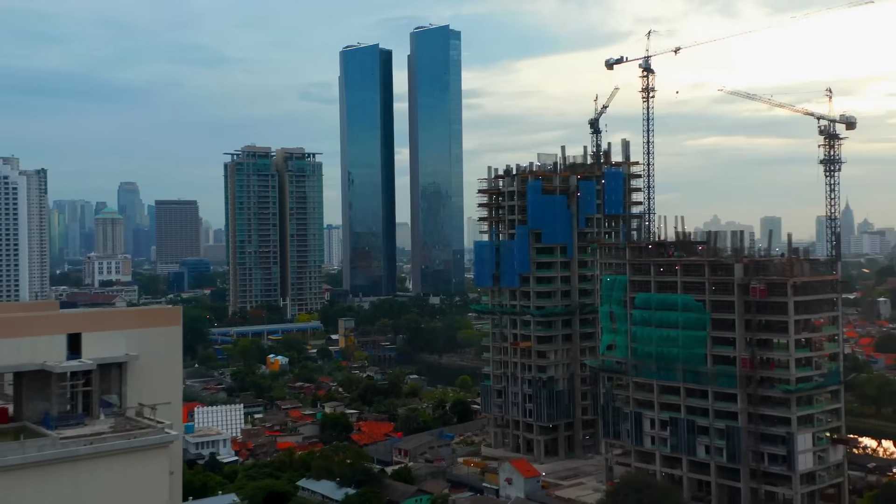Put simply, the way we build our towns and cities needs to change. The construction and operation of current buildings accounts for 40% of the world's energy consumption and approximately one-third of greenhouse gas emissions.

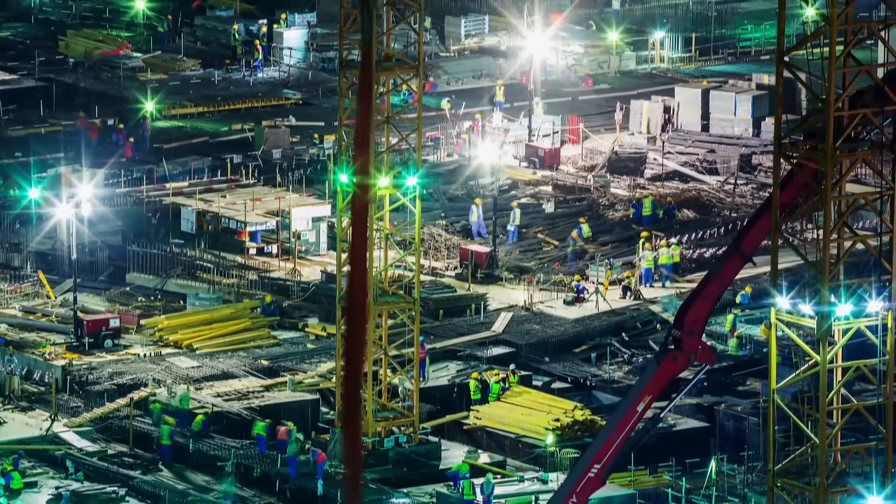But could one of the oldest building materials known to humankind form part of a modern solution for our buildings and cities of the future?

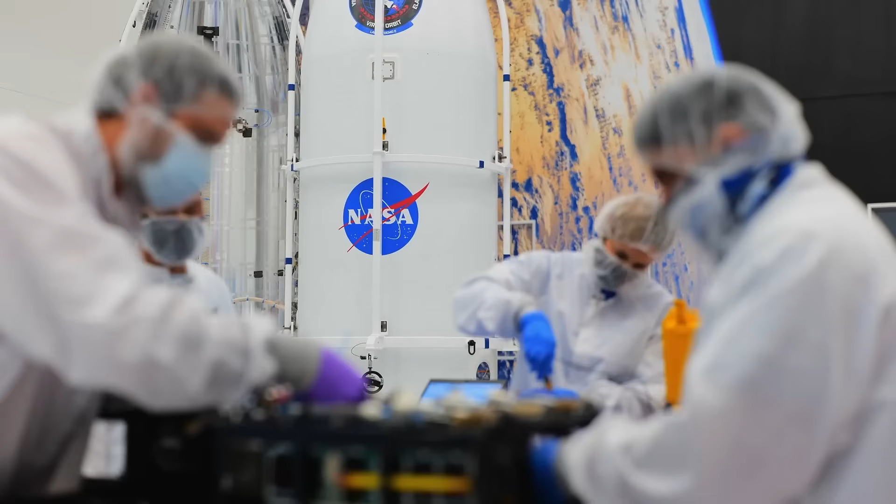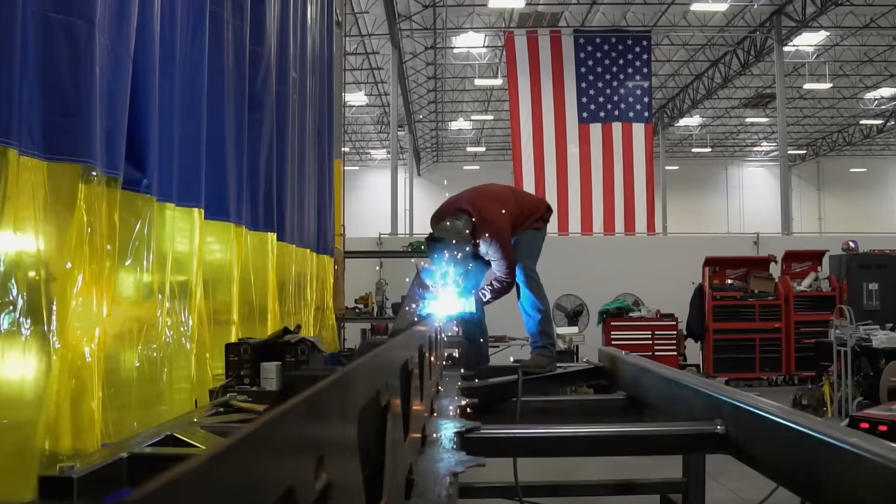A global technological revolution is underway. We think in the next 10 years, you'll see more innovation than we've seen in the past 50, driven by passionate, dedicated individuals intent on shaping a new world. I want to create something new, something that gives me the sense of creating new life. This is why I'm here.

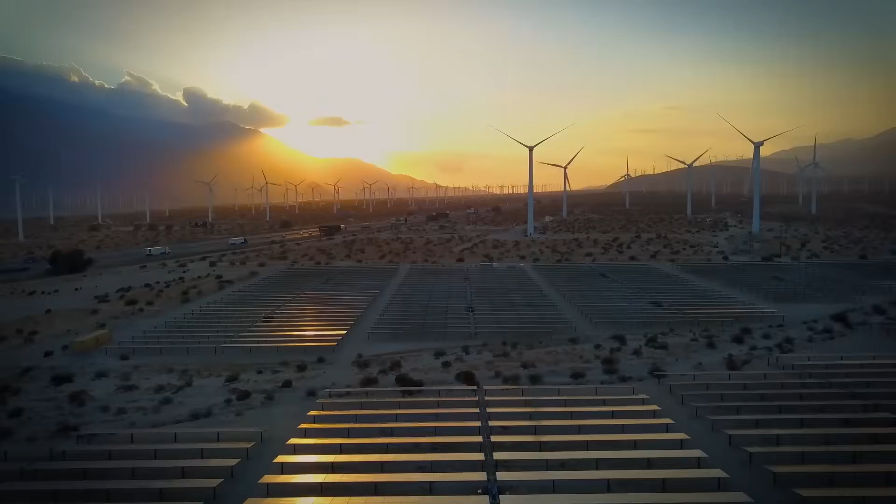A greener world. This is the last call to action, that we have to develop the solutions that are protecting our planet. A better world. I have a family, and when I think about the life I want them to have, and their children to have, I want them to experience a world where they can travel and live without worry. That gets me up and going every day.

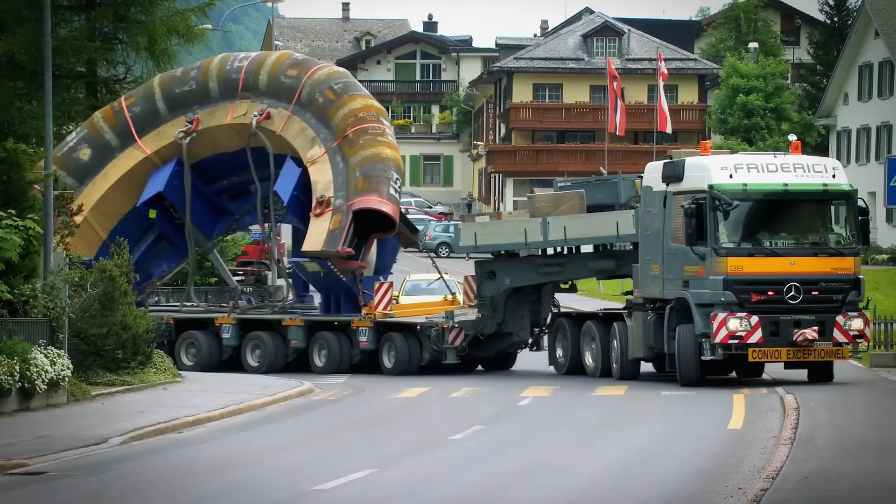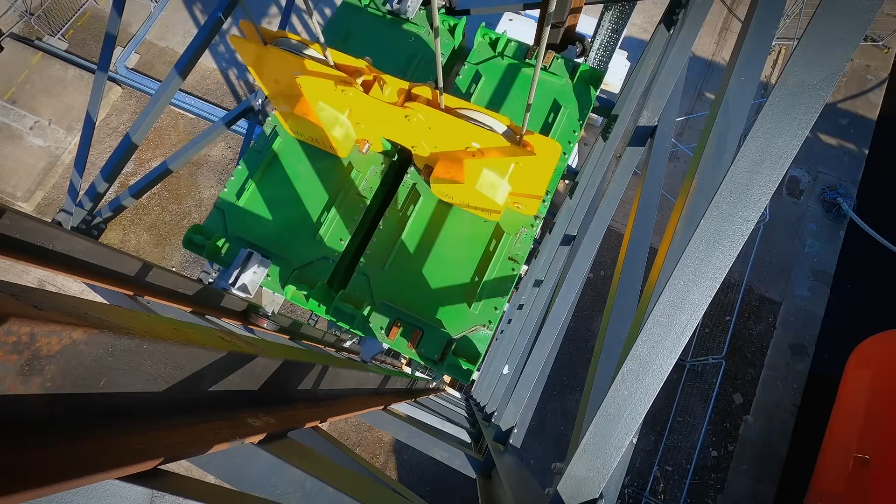Together, they are pushing engineering to its limits. Human creativity is the most tremendous power, and if you set a target, things that you never thought possible become possible - creating extraordinary machines that can help the planet and humankind in the future.

Architect and historian Professor Maxwell Hutchinson has not only been designing buildings for half a century, he's also been involved in their conservation, some of which date back over 1,000 years. He's one of a growing number of people within the construction industry who believes that the huge carbon footprint associated with our current use of building materials, such as concrete, is unsustainable.

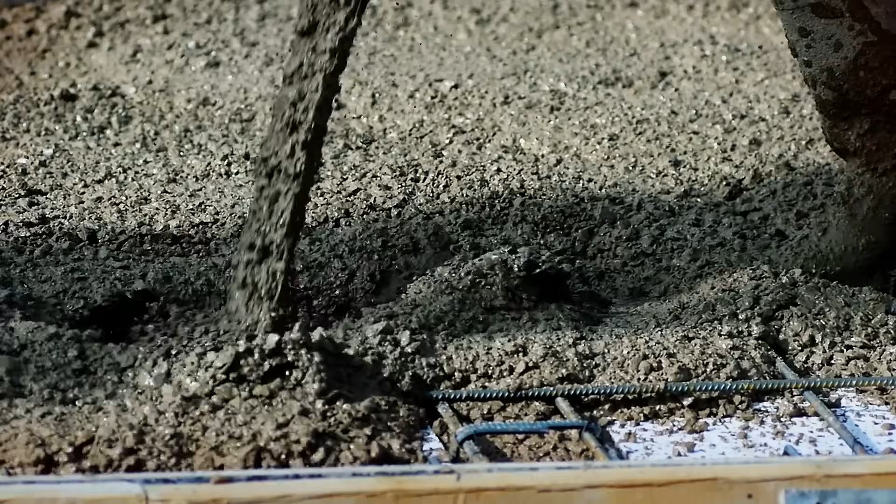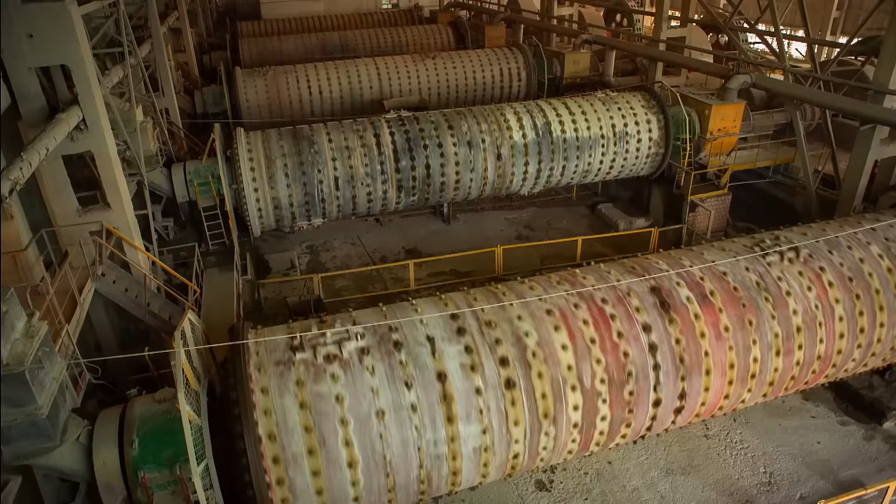There is general consensus that we need to change the materials we use in building all of our buildings. There's a huge amount of embodied energy - the energy that goes into making the material, transporting it, and putting it into position. Portland cement, the principal ingredient of concrete, is incredibly energy intensive. It is estimated that annual cement production currently accounts for around 8% of global CO2 emissions.

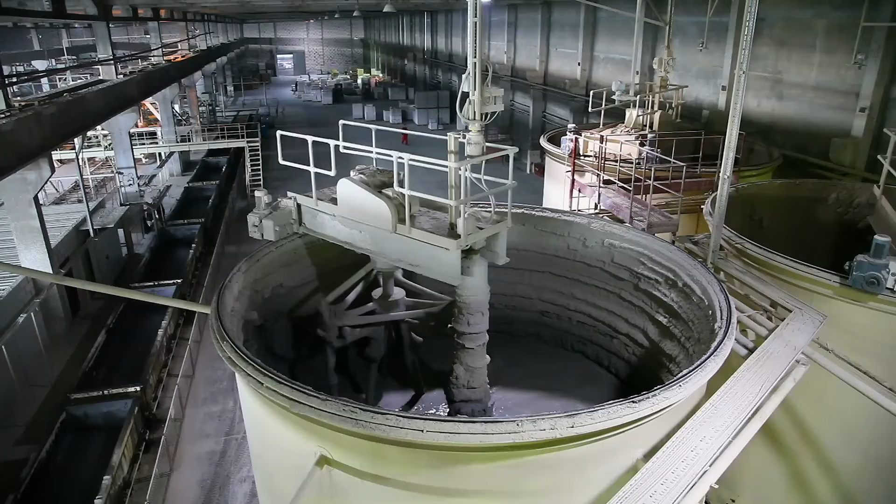And what the cement is mixed with to create concrete further compounds the ecological damage. Every year, the construction industry uses 50 billion tons of sand - that's enough sand to cover the United Kingdom. And the problem is that the world is running out of the right type of sand. The wind-worn granules found in deserts are far too smooth to bind together to form stable concrete.

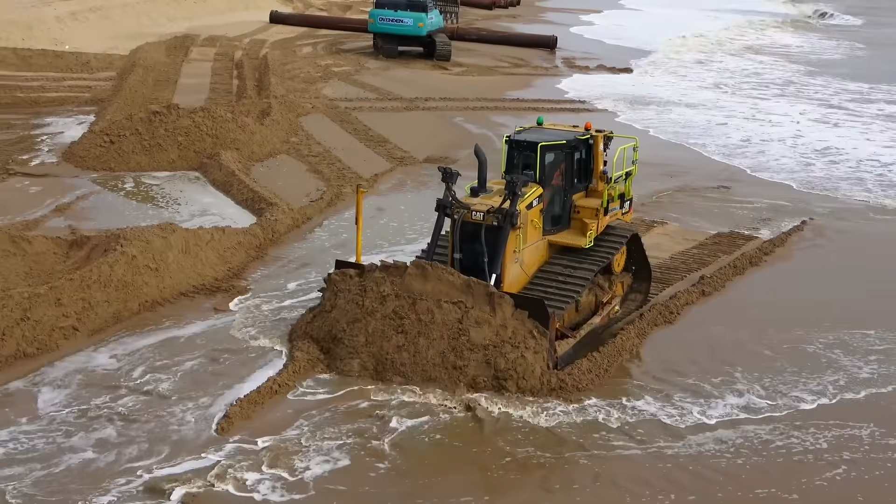So acute is the shortage that all over the world, riverbeds, beaches, forests, and estuaries are being stripped bare, often by organized criminal gangs operating on a vast scale, with lethal consequences for those who oppose them. But what if we could find a sustainable way of using an extraordinary building material, one that as part of its production process actually absorbs carbon? Well, the good news is, we can.

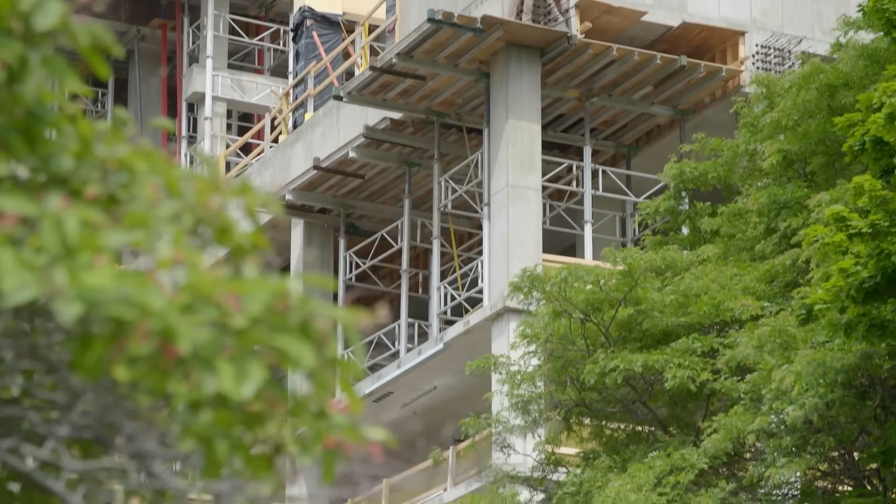In downtown Milwaukee, we might be seeing a glimpse of the future. Amongst much media attention, a groundbreaking ceremony is underway. Normally, this takes place before even a shovel breaks the earth, but this is no ordinary build. Although concrete foundations, parking floors, and lift shafts have been completed, for those involved in this project, it's all about what comes next.

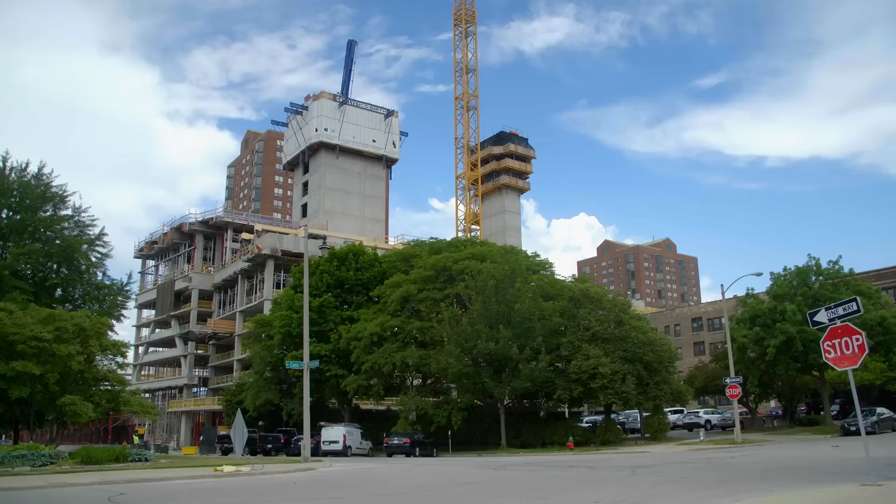If it's not been apparent, literally words cannot describe the excitement I feel about being here today. Property developer Tim Gokhman never intended to make history - he just wanted to make a building that people wanted to live in.

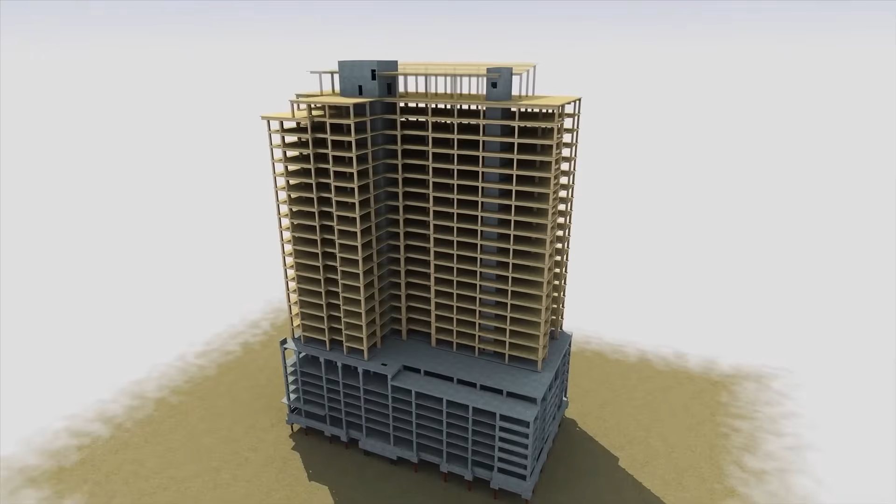Standing 284 feet tall, its 25 stories will house 259 luxury apartments, a pool with retractable walls, even an outside cinema. When completed, it will be the tallest timber building in the world, and many believe it'll point the way for how we should be constructing our cities in the future.

Its name, Ascent. I remember structural engineer John Peronto said this building would change the way that codes are written. John, I don't know where you are - I thought you were being dramatic. I was wrong. You probably heard the quote - I did say when we started this, if we get it built, it will change the code.

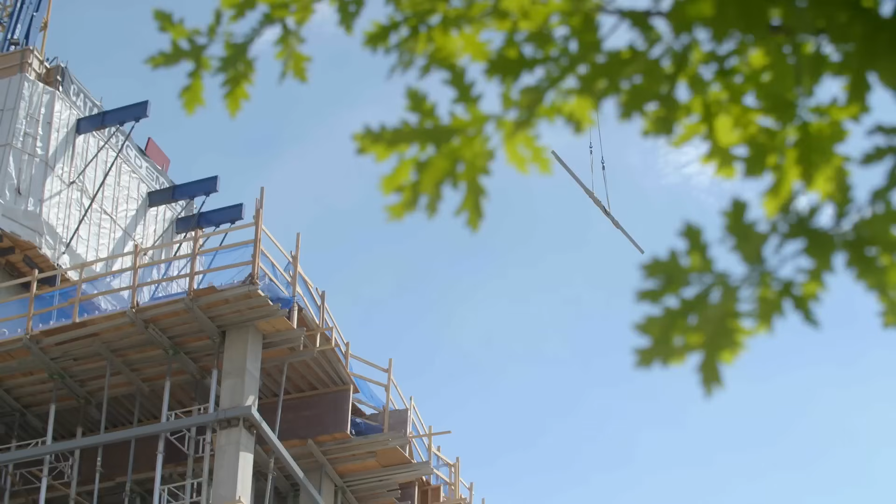It will. To be able to create a building that will change the codes and rules that govern tall timber buildings here in Milwaukee has required the support and cooperation of some of the finest engineering talent from around the world - the city planning authorities, the fire department, even the U.S. Forest Service.

You know, it seems like when you're doing something really special and you believe in it, things just come together.

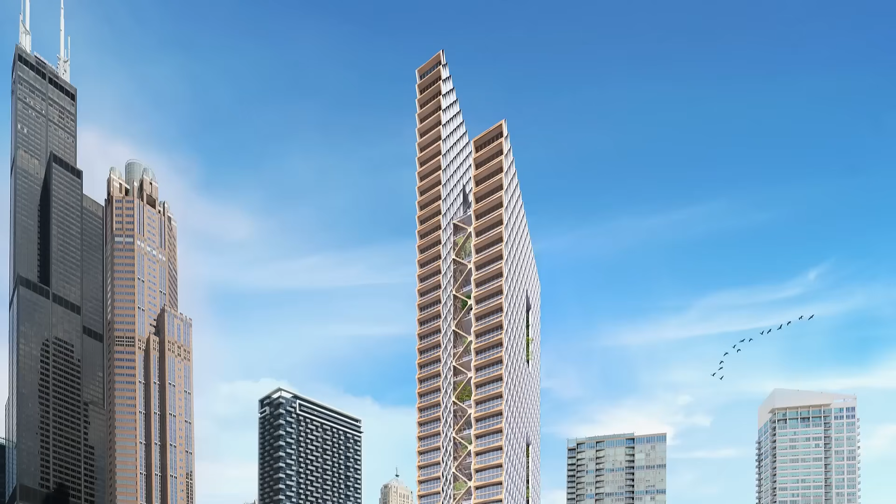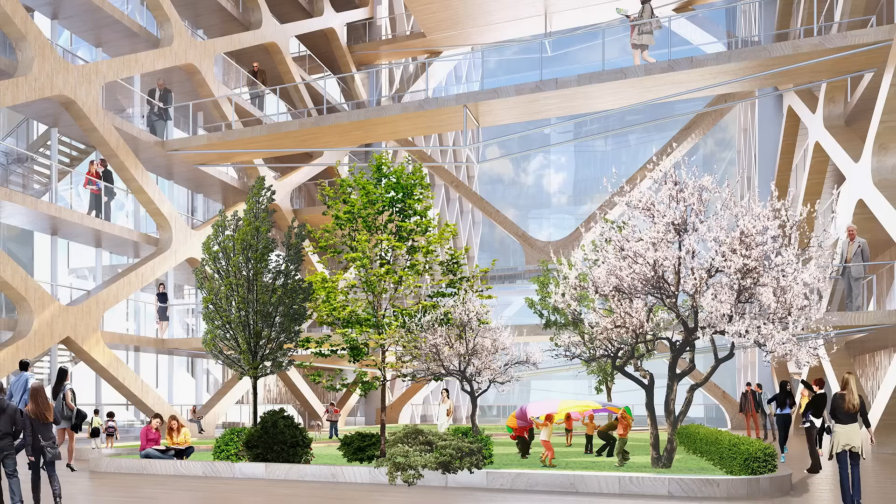What inspired Tim Gokhman was seeing a project for an 80-story concept design by architects Perkins and Will, Cambridge University, and engineers Thornton Tomasetti. These projects that we do internally in the industry are really what spur innovation. And the aim of this particular project was to see how far you could push the boundaries of timber construction with the innovative use of prefabricated components.

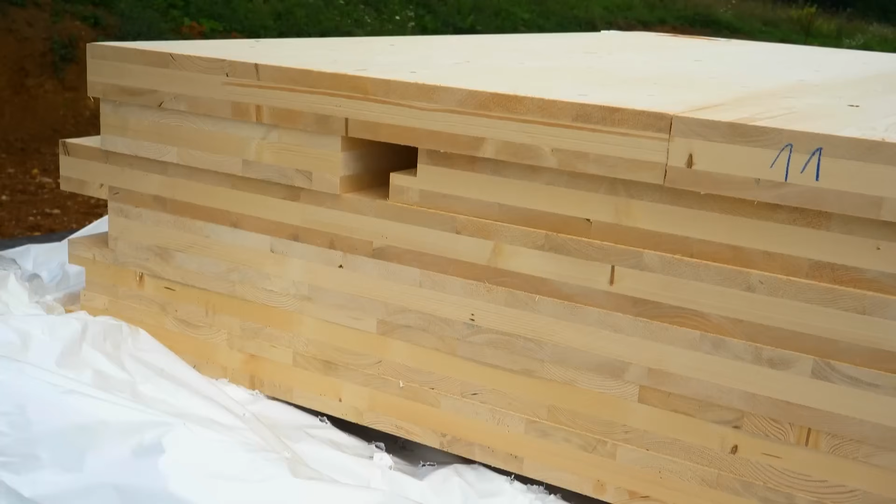They include glue-laminated timber beams, known as glulam beams, and panels made from cross-laminated timber layers called CLT. Collectively, they are known in the industry as mass timber.

It seemed like something out of the future. It was unbelievable—not just the fact that you could do this to such a height, but that all the wood was exposed inside. And I sent it to the rest of the development team, our architect, et cetera, and we asked the naive question of: can we build a high-rise out of timber?

I think Jason's been waiting for years for a developer foolish enough to ask that question, so he was pretty excited. I would say a combination of excitement with a healthy dose of fear tacked on, because it had never been done. Excitement and nervousness. It's one thing to do research projects, another thing to actually bring it to reality.

I would say River Beech was more of a research project than what you would call even a concept study for a project. But if it could be achieved, the potential benefits are huge.

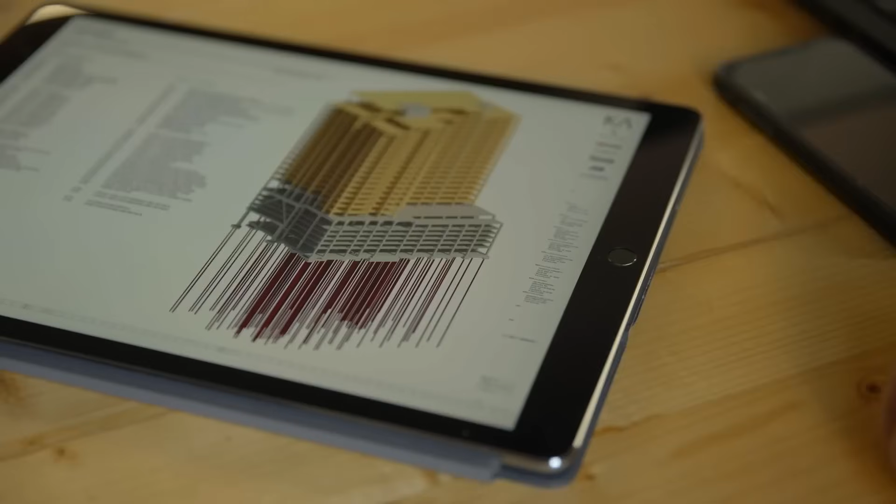Some estimates suggest prefabricated mass timber construction is 25% faster than a traditional build, reduces construction traffic by up to 90%, and cuts the people required on site by three-quarters.

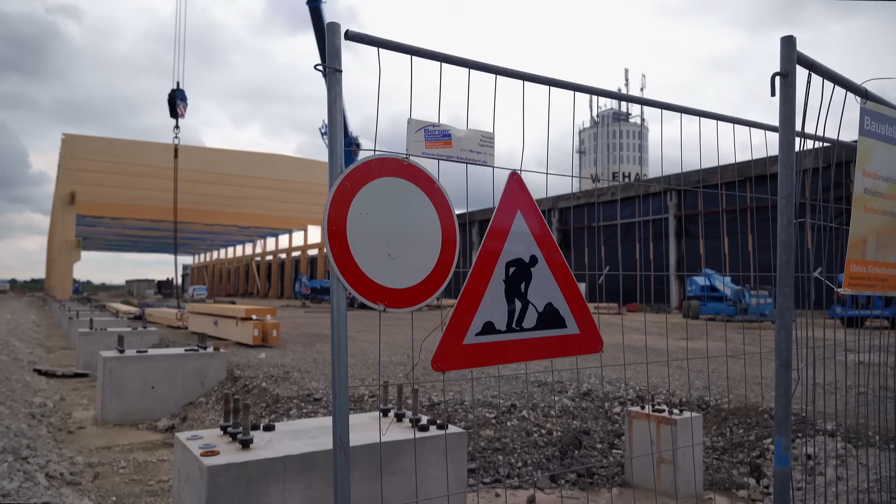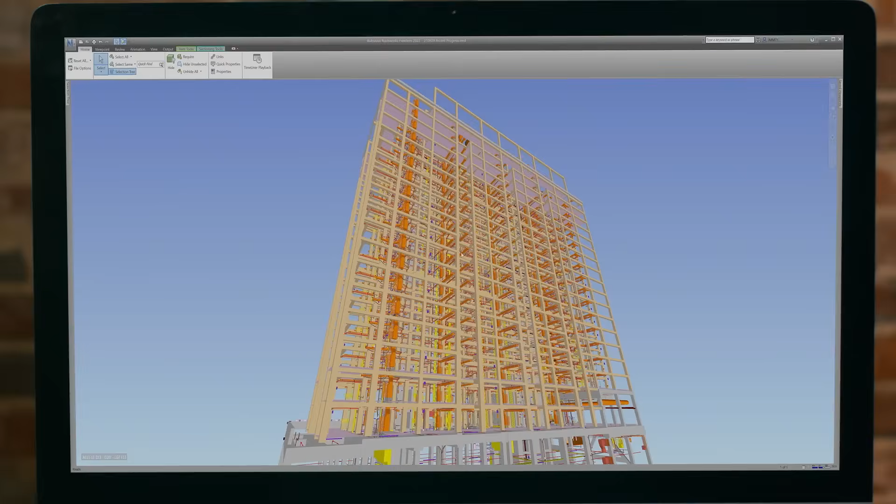It is such a pre-engineered system, done to a detail level not typically done for steel or concrete, that it becomes much more complex. The level of coordination we were required to manage was like nothing we've ever seen before, because we digitally built this building down to the last screw. So it's been really, really eye-opening.

And this is the way that buildings are going to be put together in the future.

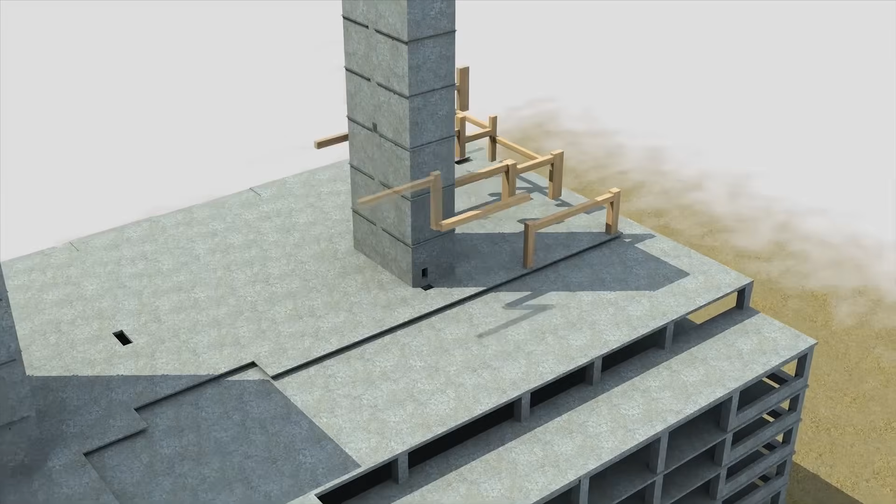Because of the concrete base and elevator shafts, Ascent is what is technically known as a hybrid, with timber making up 70% of the structure. Although high-rise hybrids have been built in Europe and Canada, this is the first time anything even close to this has been attempted in the US.

In general, the mass timber frame supports the weight of the floor—basically everything you're standing on. In a wind-like condition, where you have wind blowing on the building, or say a seismic event, that is resisted by the concrete cores.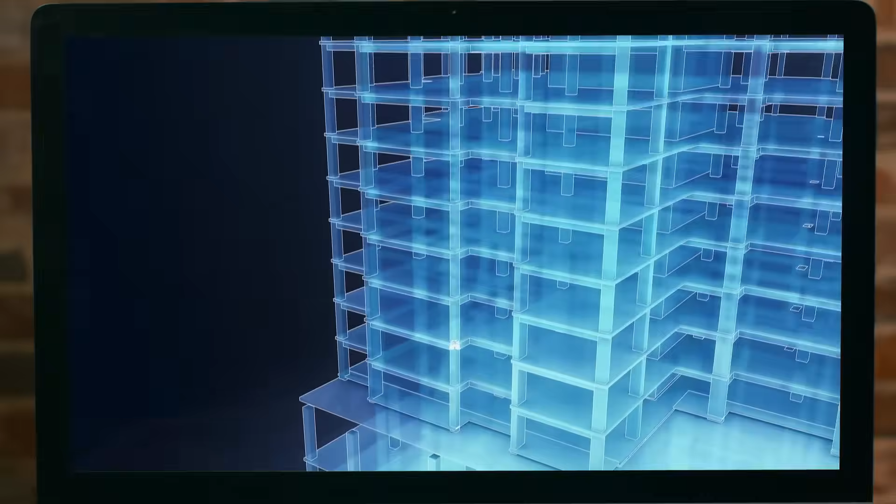A really good example of the level of coordination required is driven by the fact that as the building goes up, the timber structure gets smaller and smaller because it's carrying less gravity load. However, the number of screws attaching the members stays the same. And so, literally near the top of the building, we were running out of space in the wood for the screws to not clash with each other. The amount of coordination it took to make sure the connections were properly designed and free of conflict was hundreds and hundreds of man-hours by three or four different companies.

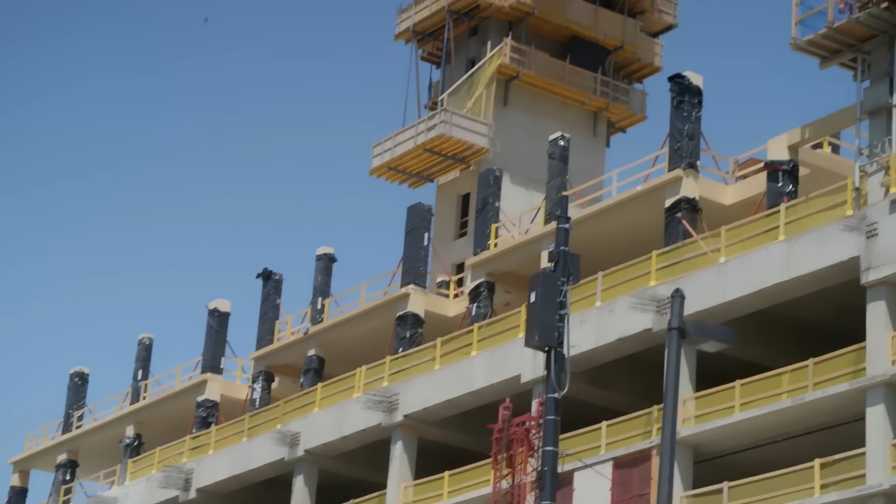There are a bunch of theories as to: is it going to build faster? Is it going to be as precise as you believe it's going to be in the models and as others are telling you it's going to be? Yes, it was all theory.

Most developers wouldn't have the grit to really push on and do a project of this type. It's one thing to do something new, it's another thing to be the first. It's probably not something a rational person's going to take on. We didn't realize how challenging it was going to be, and I think you need that for innovation.

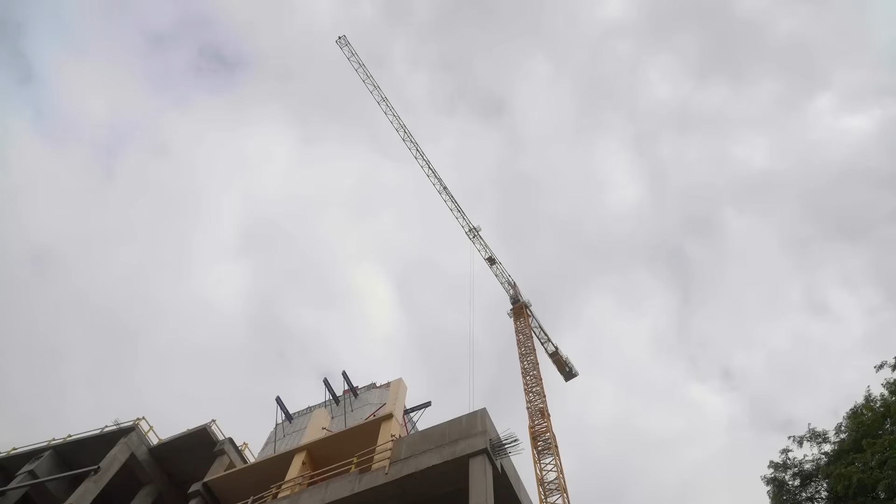Designing such an imposing wooden structure is one thing, but to bring the designs to life, you need to find people who can build it. But who do you need?

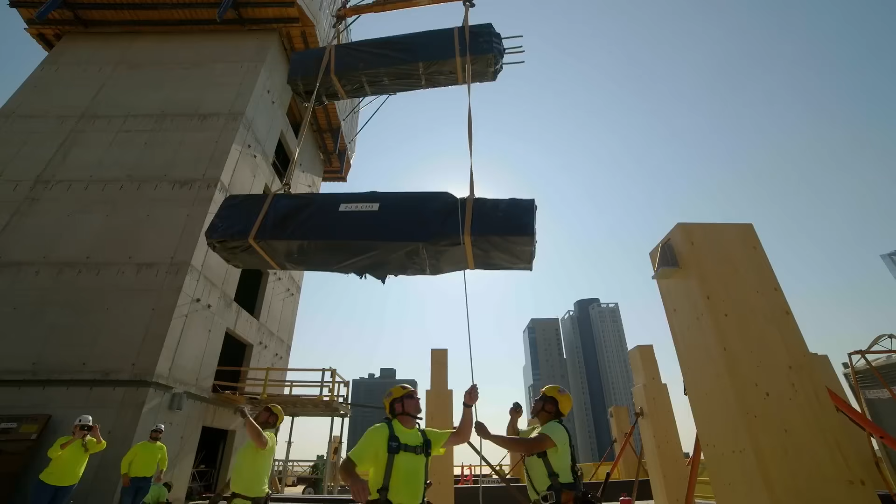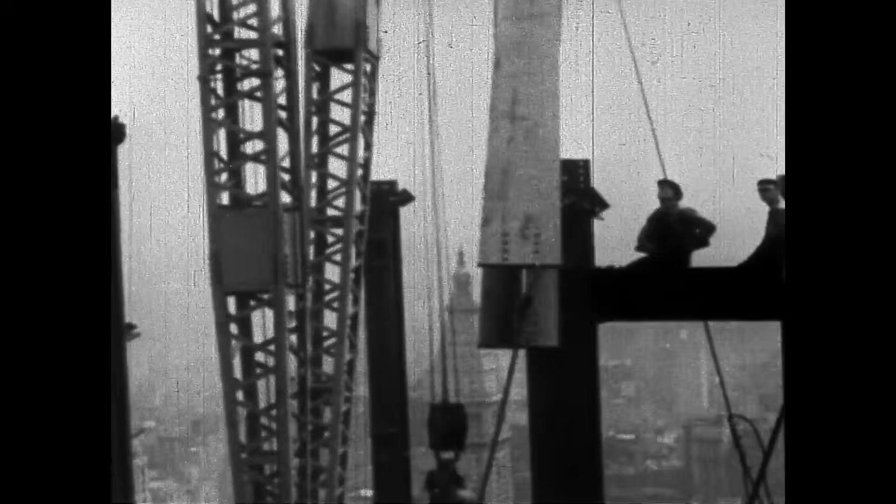The materials obviously point to carpenters. However, the building's size and structure requires the expertise of ironworkers, who became synonymous with the skyscraper in the first part of the 20th century. For contractor C.D. Smith, putting this team together meant consulting with workers and unions to create a new way for these established trades to combine their skill sets.

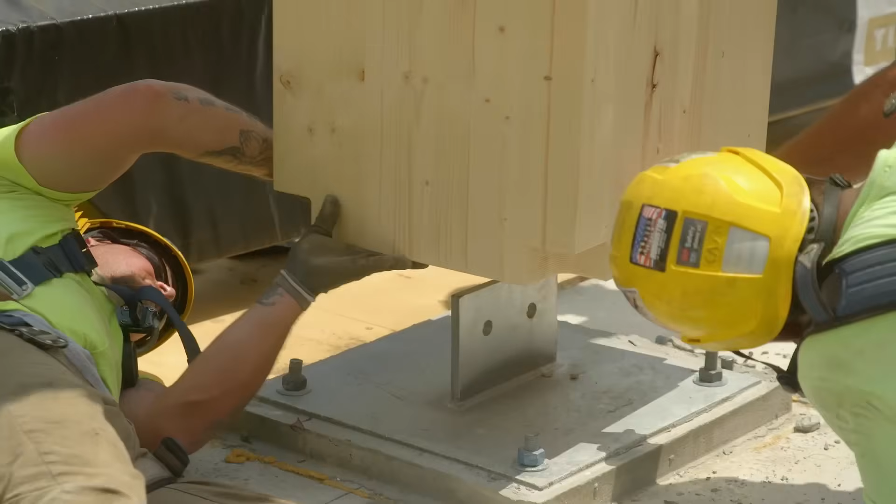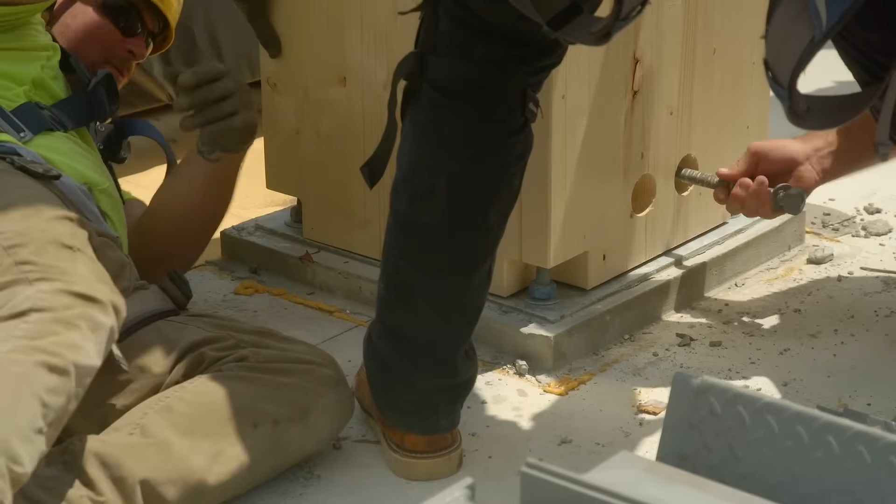It doesn't matter if you're a carpenter, iron worker, or an office guy like I am. We all can have our opinions and thoughts, and maybe it's the right move, maybe it's not, but everyone does a good job of communicating, and everyone wants to get to that finish line as quick, as safe, and as cost-effective as possible. They call it a joint venture.

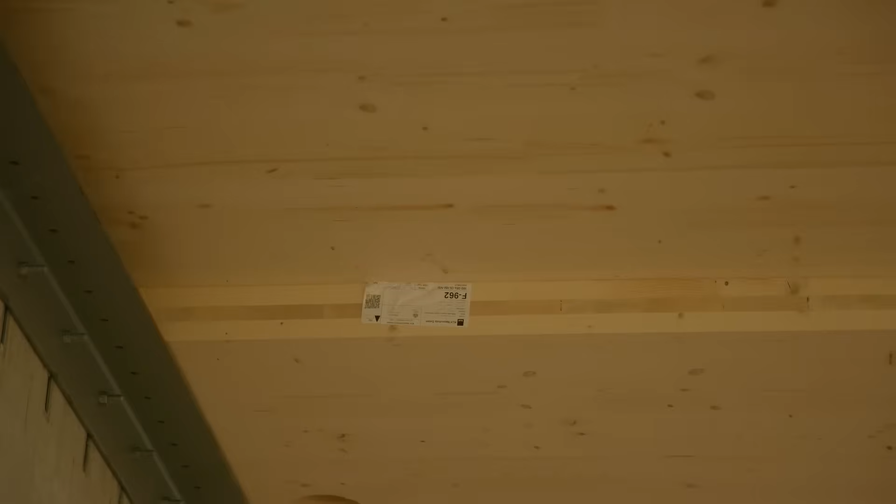So basically, everybody does a little bit of everything, regardless of what union you're part of. There's a lot of first times, a lot of people coming, introducing different ideas and different methods that we're gonna adapt on the fly.

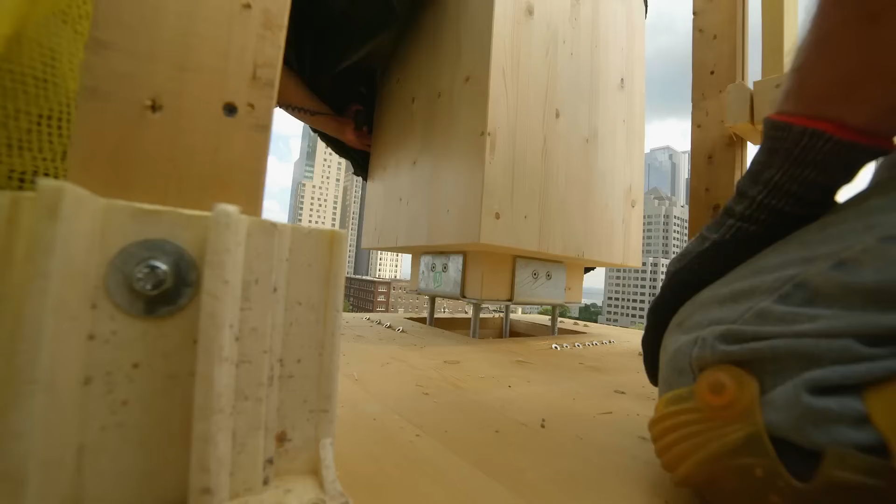Beautiful working. Normally we set up rebar and a pan and you pour a column and then you build a deck and you pour a deck. It's like concrete's like making cake. Wood's completely different than concrete.

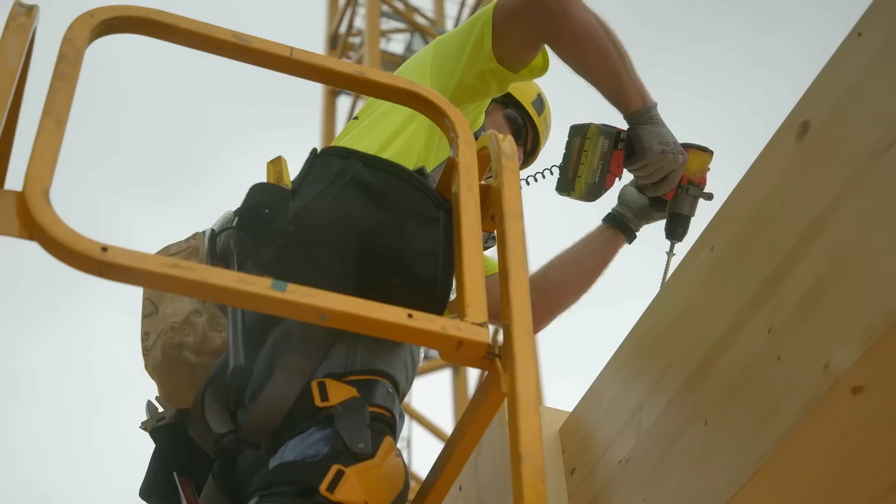This is pretty neat. If all goes according to plan, one of the benefits of this prefabricated design will be the speed of its construction and the fact that it will require an assembly team of just 12 skilled workers. However, the complexity of the challenge should not be underestimated.

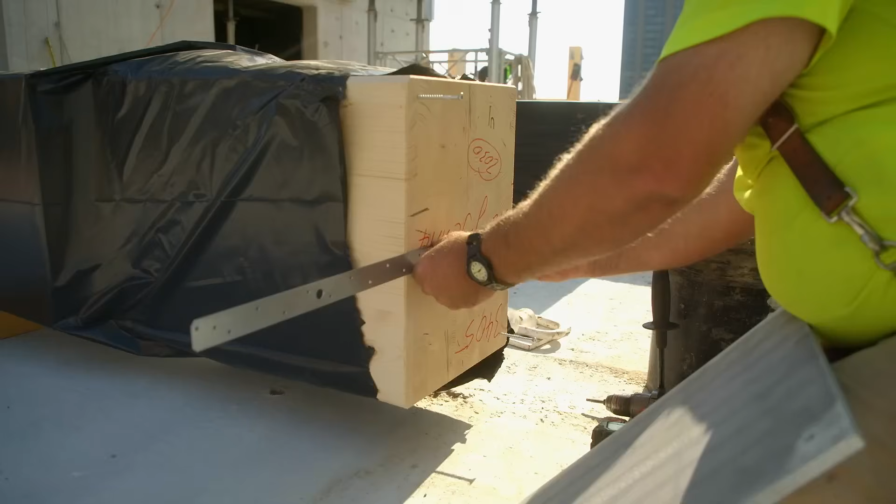All very different from pouring concrete into molds. Even the most experienced of contractors could be forgiven for feeling a little daunted by the sheer scale of the kit of parts they are going to be working with.

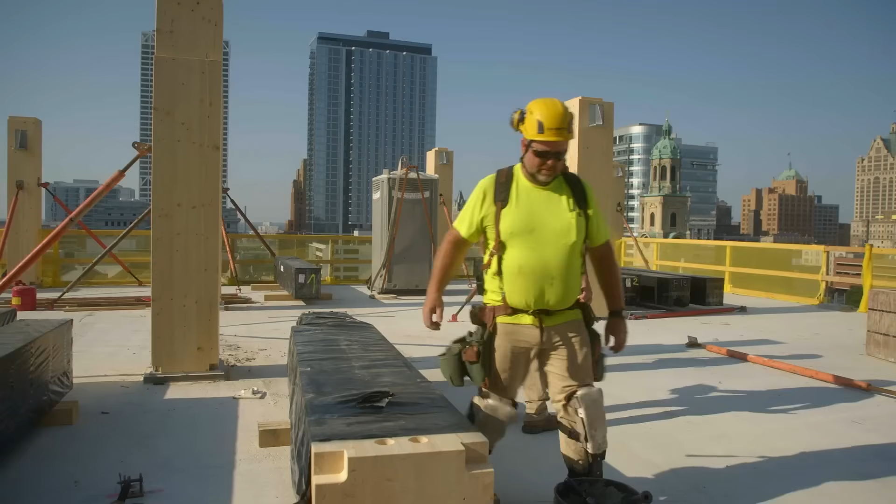Some are glued, some are straddled, it's wood on wood, some have a knife plate and there's bolts that go through the timber. And then you see the screw detail. There's a million screws and fasteners that hold the whole picture together. It's a big jigsaw puzzle.

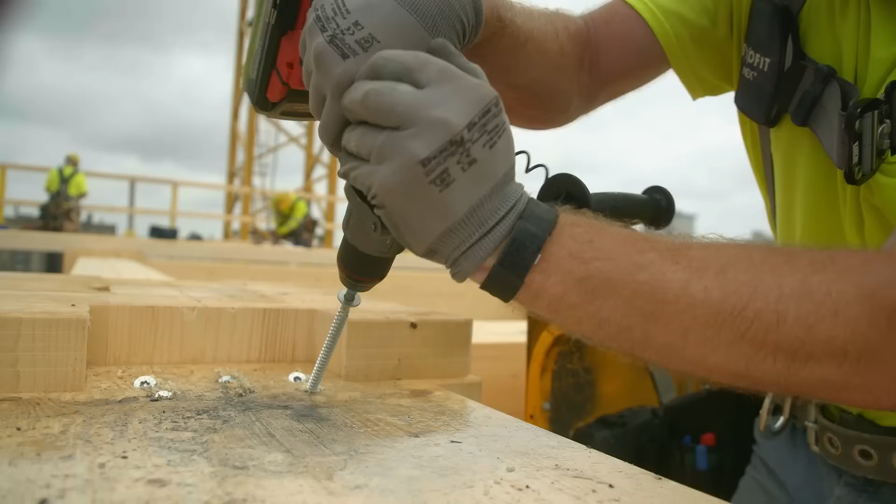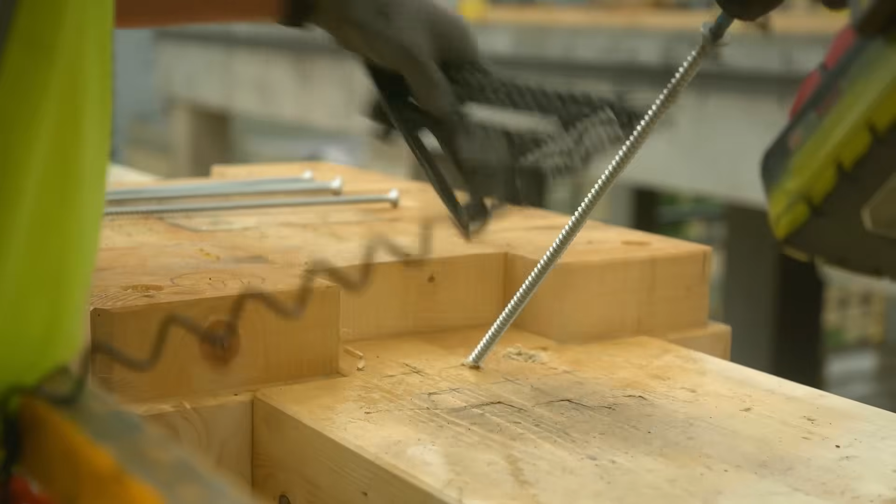And it's a jigsaw puzzle that requires the utmost precision. Certain columns, in one face, there'll be 16 16-inch screws that hold it, and trying to fit them all in within this spec. Each screw has to be within 1.25 inches of each other, and then not hitting another screw as you're driving in. Every screw has to go in at the perfect angle to make sure that the screw thread is in contact with the right layer of laminated timber, making up the beams and slabs.

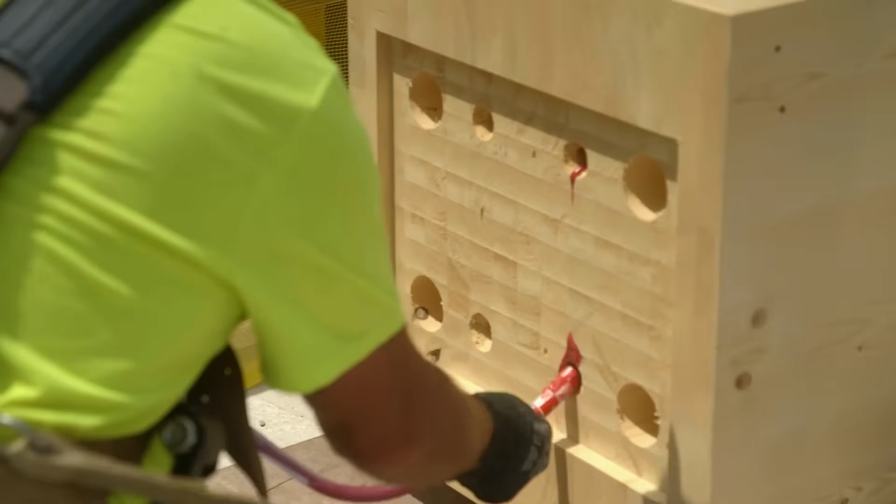Yeah, I'm learning every day. And when it comes to positioning some of the columns, which require quick-setting epoxy resin glue, there is an added pressure of time before it sets.

And then when I say ready, it's rocket time. You got 8 minutes to set it. So and then you got to plumb it before the glue hardens too.

Every column has to be precisely vertical to fit with the floors that will follow. You can set like 12 a day. We want to get faster than that. We want to do 24 a day.

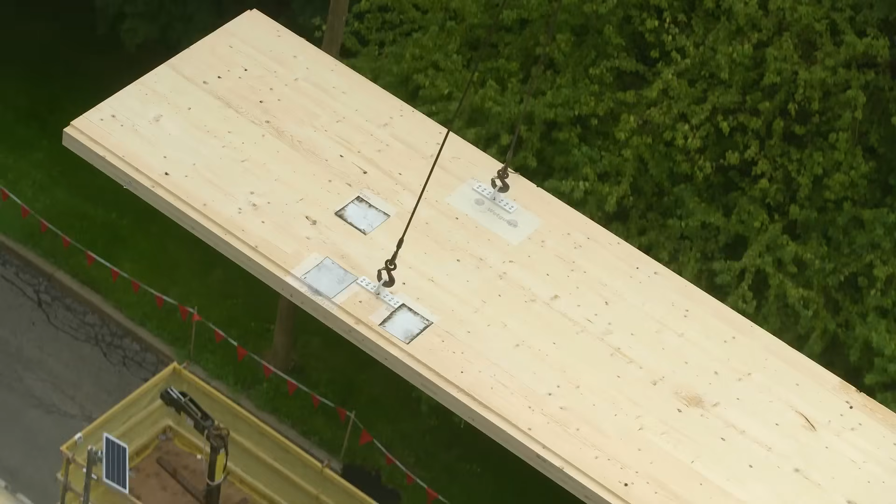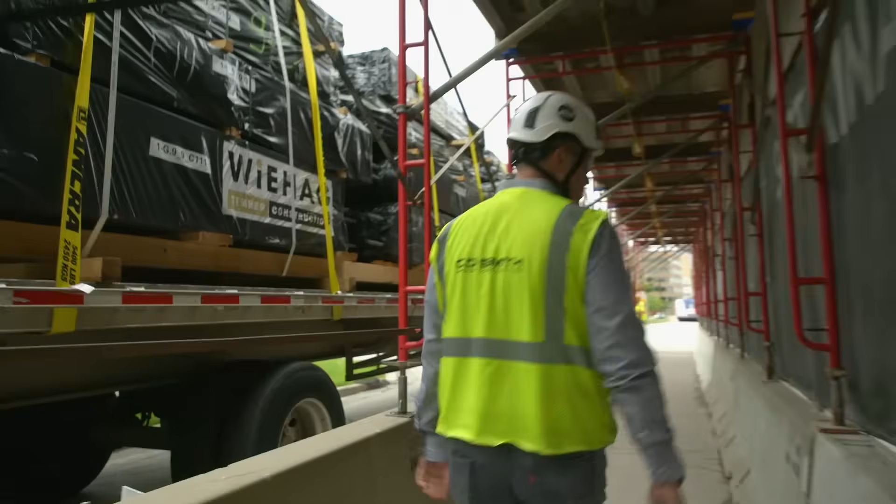For a building that has so many prefabricated elements, good transportation is going to be crucial. But project manager Chris Johansson is keenly aware this is one area that could easily wreak havoc with their tight schedule. There's a lot of concern with the global shipping industry. With COVID, there's labor shortages at ports, there's labor shortages at rail yards. All of that combined into us just starting delivery of over 400 containers.

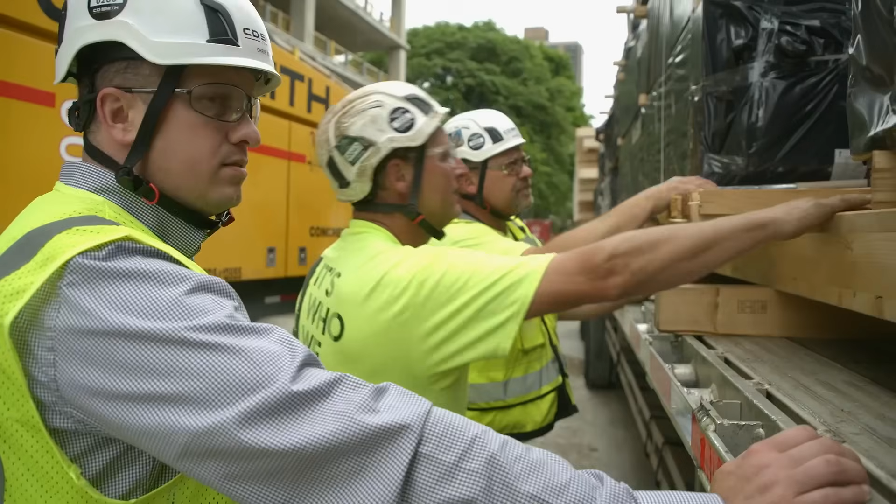And then there's the weather. Yeah, it's gonna be coming very shortly.

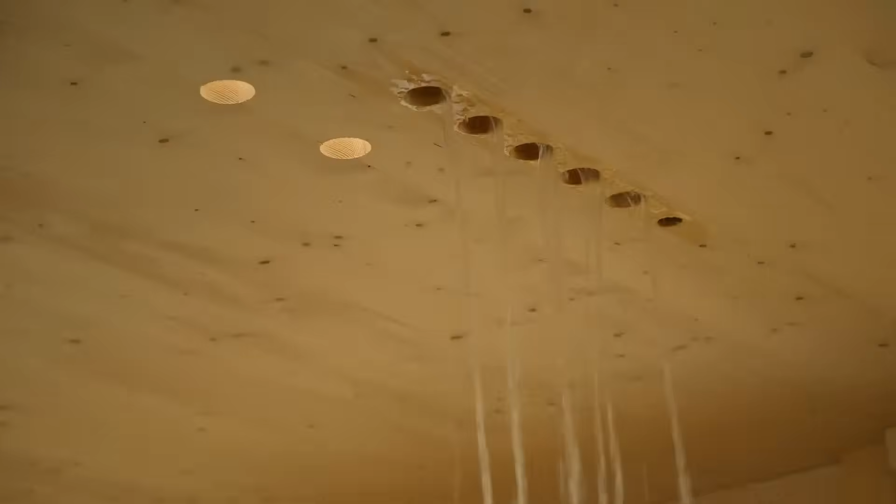If timber skyscrapers are to become a familiar part of our cities, there is one key attribute in particular that is essential they possess: endurance.

For anyone who doubts the longevity and durability of timber, look around me. 1060 and the timber's still here. This is St. Andrew's Church in Greensted, in the county of Essex in southern England.

The oldest timber building in Europe. Like many churches, it has evolved and been added to over the centuries, but its thick timber walls date back over 1,000 years to a time when England was still ruled by Saxon kings.

The structure and shape and form of timber buildings was determined by the trees that were available to build the building. Engineers have to be able to calculate every part of a building. The challenge that we face is how to take this material and give it the uniformity and predictability that we need in our modern buildings.

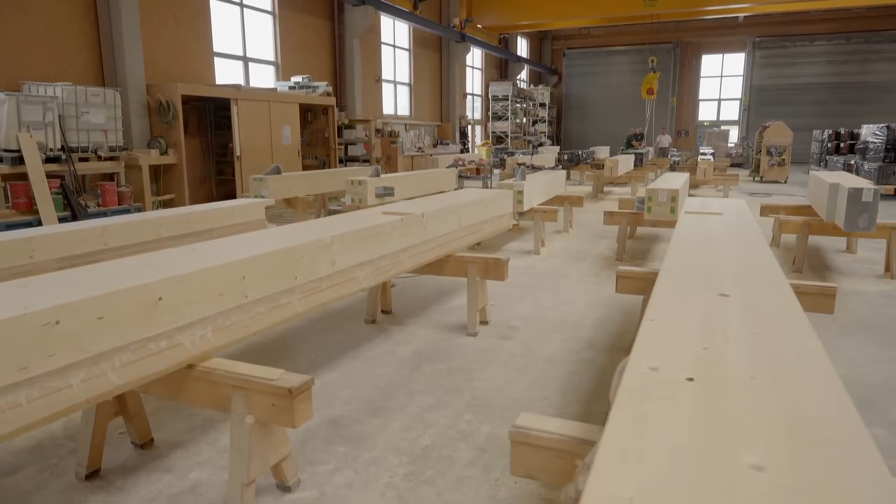The prefabricated timber structure needed to create Ascent is being produced in Austria. Almost half of the entire country is covered in forest, occupying an area the size of Switzerland. And with centuries of experience and an eye to the future, they are currently planting more trees than they harvest.

The slower a tree grows, the denser its ring pattern. The higher the density, the greater the strength. It's for this reason that timber from the Ascent project has been selected from forests at a higher altitude where the annual growth is slower.

One company, KLH, is making the CLT panels, whilst another, Wiehag, is making the glulam beams and columns. Founded by a local carpenter over 170 years ago, Wiehag has become one of the world's leaders in prefabricated timber structures. In their warehouse, timber destined for Ascent is stacked, ready to undergo a transformation that will enable it to meet the most stringent of criteria determined by the engineers.

Just to give you a picture, we produce for that building 2,300 cubic meters of glulam, but we have to pre-select 6,000 cubic meters of sawn timber. You see some of it in the background. From these 6,000 cubic meters, we selected only the best boards. We don't throw the others away, we just use them for other projects, for normal projects. But the pre-selection process was an extra mile for the Ascent building, yeah, definitely.